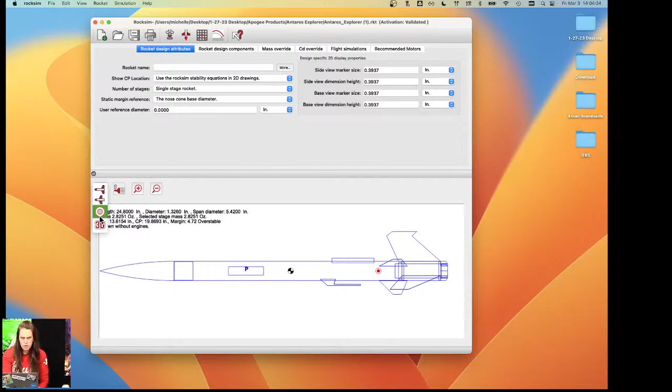This is the Antares Explorer, one of our newest rockets. I think it's the newest one. We have so many things in the works right now that I lose track of which rockets are actually released and which ones are coming up soon. We should have a new one, or we should have it next Tuesday, another one coming out. But this is the Antares Explorer here.

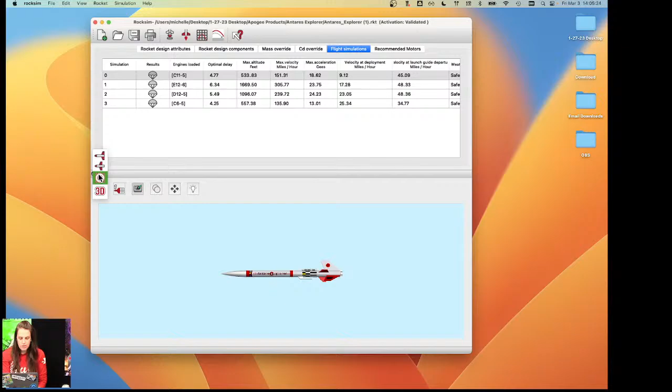So anyways, motors, right? You can see here there were some - I'm having mouse issues too, moving between my external monitor and the computer. So say last time you flew this, you flew it on a C11-5, but I reopened it, and since this is the first time I've opened it, there's no motor loaded in it. So instead of having to go in and choose engine, find the motor you want in the list, if you've flown it before...

Say you have motors that you pretty much always fly, Estes black powder motors. What you can do is run your simulation one time, and then say, oh, this weekend I'm going to a club launch, but it's going to be a little windier, or it's at a different location, and I want to change the data. So what you can do here, instead of doing that whole load engines find it in the list, is you can actually go to your previous simulation and right click.

There we go, I forgot how to right click. Is it the weekend yet?

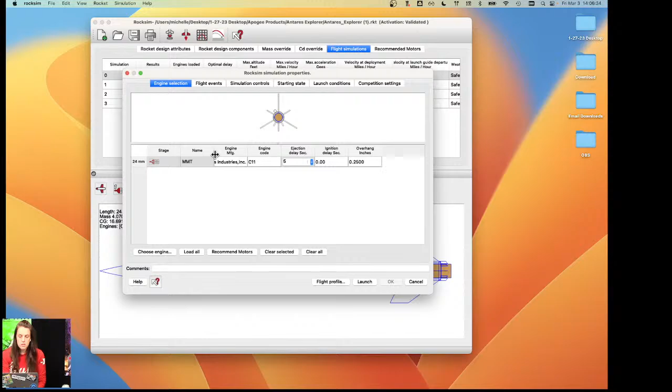So you right click, and you can either click Load Engines, which will just load the engines from last time, or if you want to rerun the same simulation, click Edit. Edit will pull all the original starting state and launch conditions. If you click Edit and change something, like instead of 700 feet we're at 7,000 feet - we're not quite at 7,000 feet here in Colorado Springs, but pretty darn close, closer to 6,000 really - you just change that.

So now if I click Launch, with the same motor and same wind settings, it's going to replace the old data. So if you don't want to replace the old data, instead of clicking Edit, you can click Load Engines, and then you can set up your simulation using whatever settings you want. So like this one has an altitude of 6,000 where I had 7,000 in the other one, and when I click Launch, it's going to generate a new line.

Oh my gosh, I think I stopped moving for the first time today.

Now I'm falling asleep. So your options are Edit, which will rerun that simulation and delete the old data, or Load Engines, which will just load the engines and let you go in and use different settings. So if you're changing launch sites but want to keep the old launch site or whatever, you can use Load Engines instead.

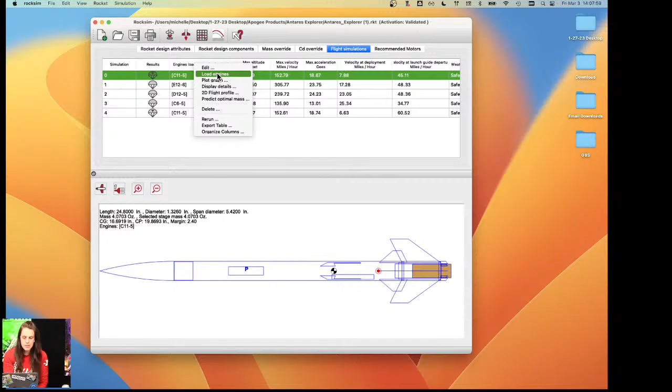When I read Stanley's email, maybe that's what he meant actually, because it doesn't load it when you first come in. So that's simple. I can also read into it that he's asking about switching between kits.

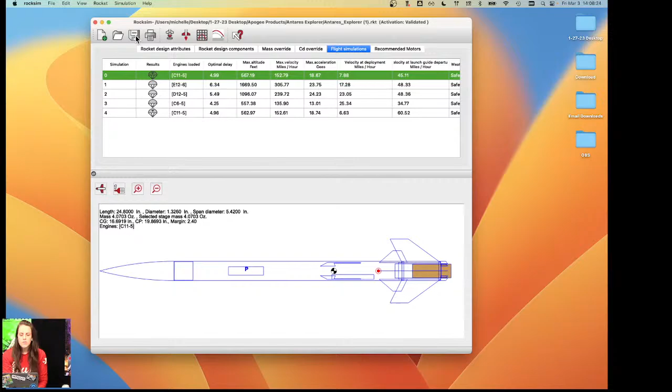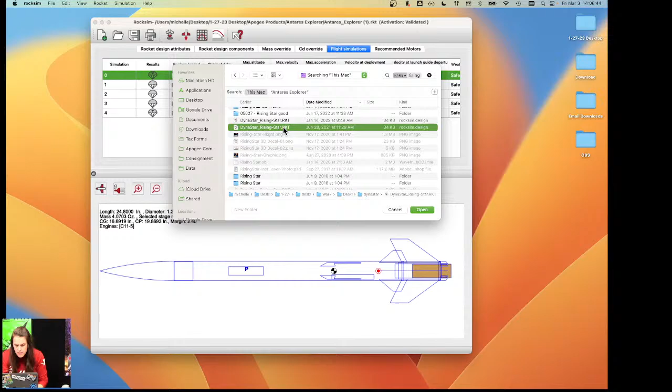So I have a bunch of D12-5s that I want to fly, and I want to test different rockets. I'm using the Antares Explorer here, and when I go to the next one, instead of the Antares Explorer, I'm going to launch - trying to think of another rocket that'll fly on it - the Rising Star. This one just happens to have a D12-5 in there, but it doesn't load it. RockSim won't remember your motors kit to kit, that's kit specific.

So depending on how you interpret the email, but you can always, if you've run the same motor before, just right click and choose from there as well. So go back to the chat.

Sturko3 says: I had trouble getting a body coupler to the right weight between two 38mm body tubes. Could you review body couplers? They showed way too much weight.

Okay, so yes, couplers - this one has a coupler in it. So the mass or weight of a part in RockSim is based on a couple things. First, when you go into the part, you will tell it the material. So paper weighs less than aluminum or PVC.

If you had paper, that means like cardboard paper, like a standard kit coupler. But think about a low power coupler versus a high power coupler - they're both made out of that rolled paper, but different thicknesses or different weight paper can change that. So it starts with kind of a generalization, and all of these are materials that you could make a coupler out of.

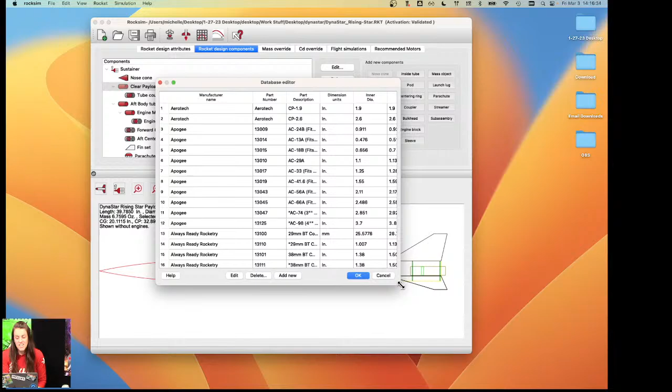The other option, if you have a coupler you bought from us or from another vendor, and you want to choose a part from the database but it's just wrong and you know it's wrong, you can go up here to Rocket, Edit Database, tube couplers, and this will edit it in the database. So for every rocket going forward, you can say no, it's going to be this amount. You can go find that coupler, this is a 56 for the Rising Star.

So this says the mass here is 11.8 ounces. If you highlight it and click edit, you can tell it no, it's actually like 9.9, which is what it's calculated. I'm not sure why it's different, other than I know it's calculating things. So you can go in and change this here. So hopefully, oh yeah.

Something's up with units here, because that window said ounces, but now look, it's 9.9 grams. I don't know, there might be a bug, or I might have just done something dumb because it's been a Friday. But yes, you can edit these things in the database. So going forward, if you want to scratch build a rocket with this coupler, you know it's right.

So those are kind of the two different ways that you can edit a coupler's weight, or any part's weight, if you disagree with RockSim.

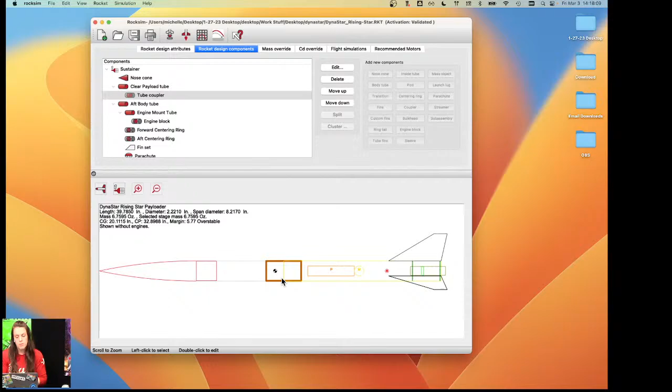We had somebody go through before we released RockSim 10 and update all of our parts, but it was done by a human, and so we found a couple errors, just human error entering things. I know there's been a couple over time, and I have a whole email list to fix things before we release the next version of RockSim. Some little tiny things. So if you do find something like that, that's just, hey, this is the Apogee coupler in RockSim, but in real life it weighs this.

You can always shoot us an email and say this isn't right in RockSim, and then I can add it to my list, because you guys use RockSim a lot more than we do, because we use it all the time, but all of you times the thousands and thousands of users of RockSim use it more and use it differently. That's the other thing, like I use it a very specific way. Tim uses it very differently than I use it. So yeah, that's one way to, whoops.

Get a little peek at our chat system there. We're working on a new nose cone, so you guys got a little flash view of that.

So yes, that's kind of how you edit parts and things. And remember, RockSim uses what's in there, so at the end of the day it's only as smart as the data that's in there. And if something's incorrect, then the data you're going to get could be incorrect for that too.

So Carlos asks, after we run a simulation with a motor, can RockSim recommend a suggested fin shape or material? Maybe someday. RockSim is not that smart.

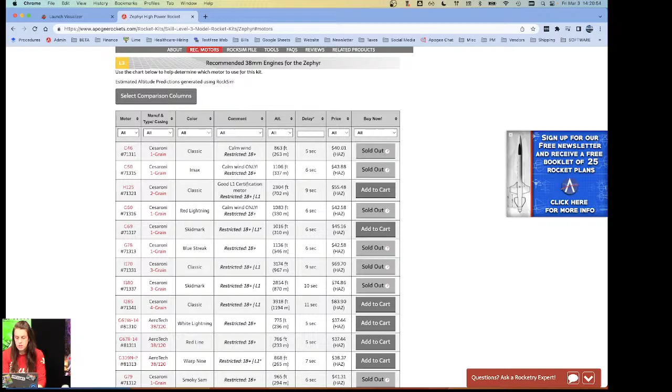So we built this feature, the recommended motor feature, into RockSim for us. It's a benefit for you guys as well, but whenever we release a new kit, or we sell a kit from another manufacturer, we create a RockSim file and we run all of the recommended motors. So for something like the Zephyr, that's a lot of motors.

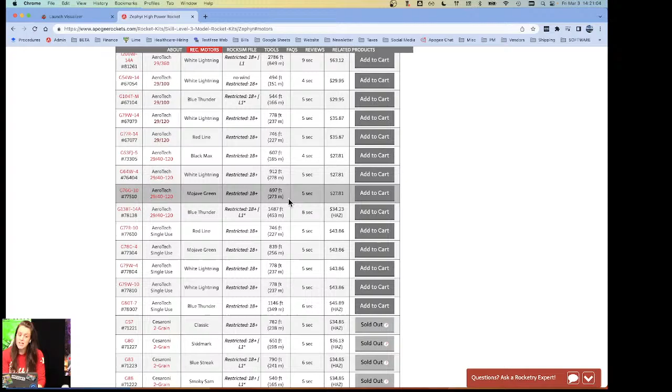And before RockSim 10, which is what we did for the Zephyr originally, you have to run each motor one at a time.

So you go, we were showing at the beginning, you have your rocket and you click load, choose engine, find your engine, change your delay, click OK, set your starting state, and set your launch conditions. Those will remember, and then you go OK, launch.

What we do is always run it for the longest delay. This didn't work because this is a tiny motor and a bigger rocket, but we run it for the longest delay. Once we figure out if the motor is safe to fly, we go back and rerun it to find the optimal delay, sometimes it'll tell you, but there's tweaking you can do. Like it says it's not recommended, but if you angle the launch rod, suddenly it is recommended. So imagine that times hundreds of motors.

So what we built into RockSim 10 is the recommended motor list. You can now, when you go to choose an engine, click recommend motors.

Like I was saying with the fin shape, this is where it comes in a bit, Carlos, to even do the recommended motors we had to say, well, what's okay and what's not. What's your starting simulation? Are you flying at sea level? Are you flying at 6,000 feet? Is temperature warm or cold? Is it windy or not windy? All of those things make different parameters that generate different results. So to do recommended motors, you have to set those.

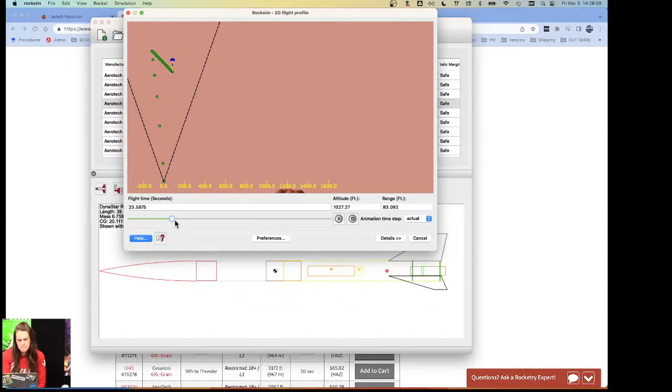It says, oh, safe deployment, it's unsafe. I see. So this was not recommended because the deployment is not safe.

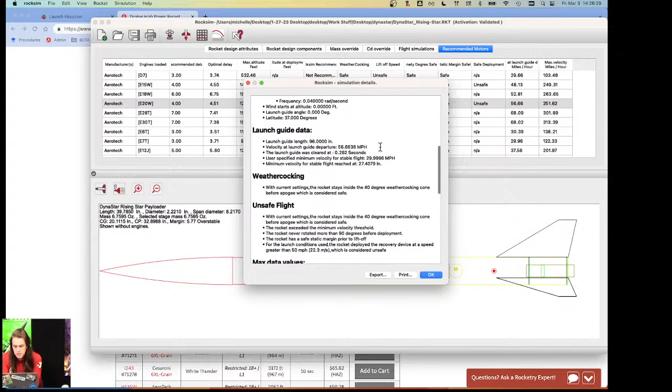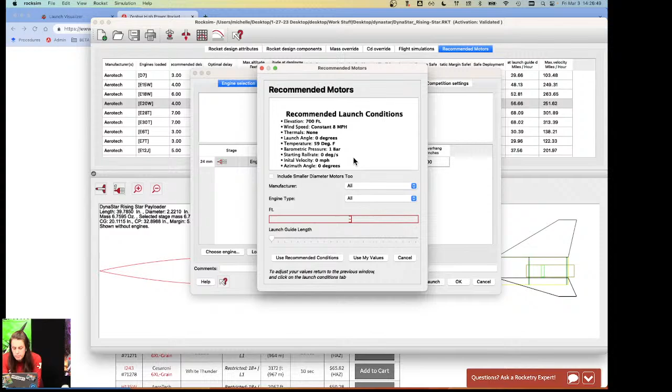So if I double click in there to go into the details, recovery system, the velocity at deployment is 65 miles per hour. And if you look at our recommended motors, it doesn't say it here, but for this one that's too fast. If it's going 65, think about driving down the interstate at 65 miles per hour and then throwing a parachute out the window and hoping it doesn't rip apart. That's why it's not recommended.

So there are different things you can do. This one isn't adjustable, but on an adjustable motor you might be able to tweak the delay down a little bit so it comes out sooner or later, or buy one that's different. Or you can use something like a chute release or dual deployment. Just because it's not recommended doesn't mean you can't use the motor, it just means you have to start thinking outside the box about why it isn't recommended.

Another example is weathercocking. Let's pick one that's maybe, here we go, weathercocking for this one.

So when we look at this, this is the weathercocking cone. If it goes outside this cone before the parachute pops out, see how it's starting to go basically horizontally? That's not really safe because it could do some damage. With the recommended motors, once it reaches that point, it doesn't keep going. But how do we fix the weathercocking issue?

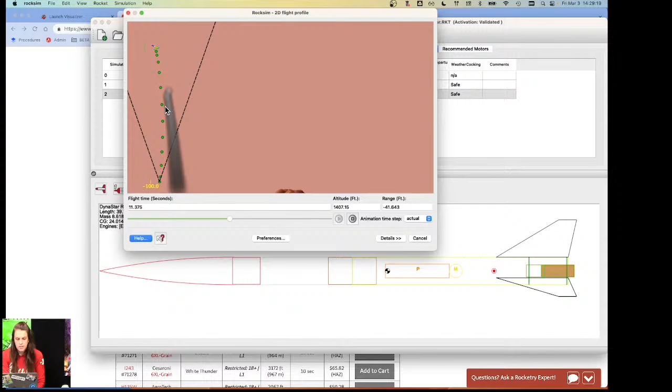So now it didn't weathercock at all because I basically corrected for that. This motor, for some reason, oh, because we ran the recommended motors, it didn't have a delay selected. I forgot, when it runs the recommended motors it'll tell you the optimal delay but doesn't actually choose it. So if you load your engines, oh and this isn't a plug motor anyway, so this is not a good motor for this rocket, but make sure you put in a delay. So that's why it crashed.

But other than that fact, we corrected for that weathercocking, so now it's safe. Just because a motor is not recommended doesn't mean you can't use it. You just have to make sure you overcome issues, like if it says your launch guide departure is too slow, so it's not safe, the liftoff speed. Your rocket needs to be going around 30 miles per hour when it leaves the launch rod to be safe, that way it can correct itself if a gust of wind hits it.

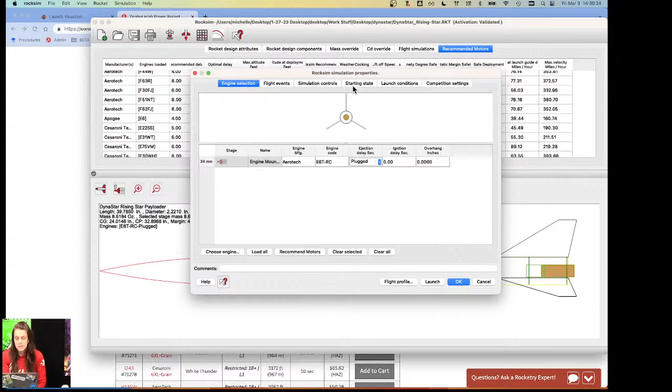Well, if this isn't powerful enough to get you there, what are your options? You can change your motor, get a more powerful motor, or you can extend your launch rod. If our starting state is, this one's 9 feet or 8 feet, you're probably not getting much longer than that. But say it was 3 feet, maybe you could get a 6 foot rod, and by that time you have 3 extra feet for your rocket to get going faster.

So that's one of the things about the recommended motor, you can totally use it and just ignore all the ones that are not recommended. That is fine, it's a starting place, it says hey these work well, it's kind of a no-brainer, this is what we can say. But just because it says not recommended doesn't mean you can't use them. There are some that you absolutely can't use, you're not going to put a little tiny quarter A motor in this rocket, you're never gonna get a combination that makes it safe.

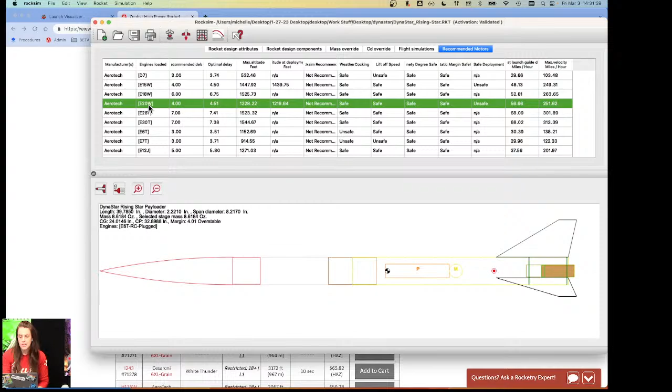But this E20, you can just figure out maybe on a calm day it won't be going 65 miles per hour when the parachute pops out. So I can fly this rocket on an E20, I just have to wait for a really calm day for it to be safe. Or if the liftoff speed's unsafe, maybe I need to get a longer launch rod. So it's kind of a cool tool.

So yeah, Carlos, it would be great if we could give you more flexibility like that. The one other downside to doing something like this is a recommended fin shape for a rocket, is that a lot of schools do projects like that. We get calls a lot from kids to basically do their homework for them.

They'll call and say, what's the best fin shape? Or you can tell they're filling out a form and just reading the questions, wanting us to answer them. So part of it does help build a little bit of critical thinking. I think that's one of the things this RockSim Live and Tim are really good at - it's always about problem solving. I feel like that's a skill becoming less valued or less used, especially when you have things like Google giving you the answers - Google, what's the speed of light, whatever. You don't have to do much research, you just pop it in. Or now we've got the ChatGPT mess, and you don't even have to think at all.

So while it's great for it to tell you different things, I think it's also great to use your skills a little bit and think. With this example, you can totally use this recommended motors list, but there's no thinking involved other than, okay, from this list which motors do I want? Which one's the cheapest? Which one can I get without hazmat shipping? Which one do I already have in my range box? That's the extent of it, maybe if I'm flying on a smaller field - which one would be best that's not going to go as high?

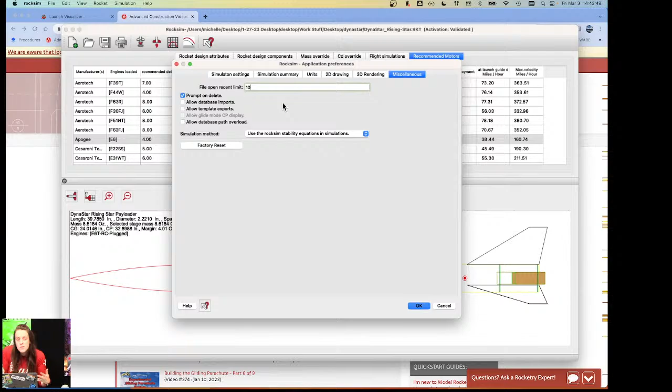So I know it does remember things to a point, but whether it remembers them file to file or every time, let's test and see. Because I know we were doing that before where we had, so like...

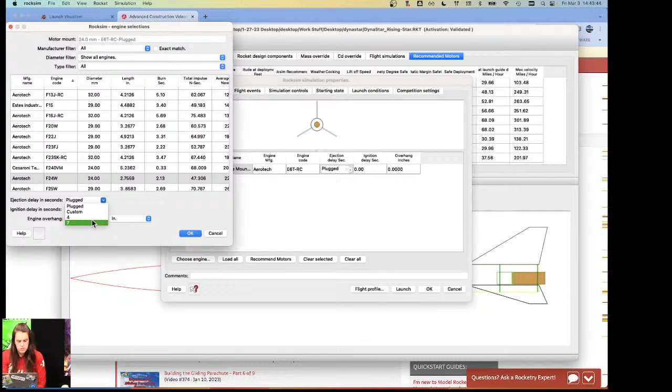6230, we're going to put our altitude here. And today it is 40 degrees outside. I don't remember what our latitude is here. And we're going to say today is 7 miles per hour wind here. So okay, I'm going to choose an engine here. We're just going to launch something.

Okay, so we flew our rocket. I'm going to save this. Now I'm going to open a different rocket kit and choose my engine. And if I go to my launch conditions, it has remembered my data here. So it's remembering it time to time.

But let's quit RockSim and reopen it. I know it remembered some stuff, I just don't remember. So there's not a default setting that you can go in and say always start at 6,000 feet or whatever. So file, open, let's pick a totally different rocket than the ones we've flown today.

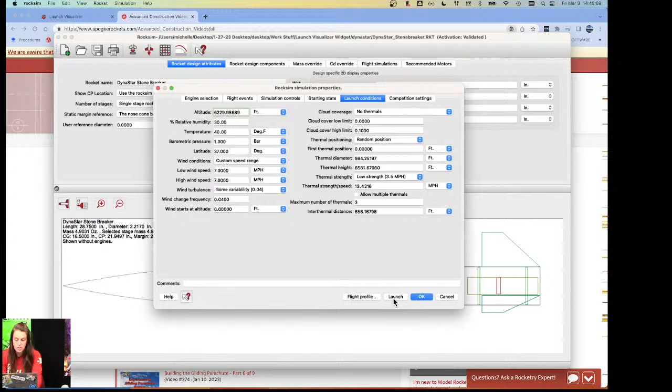I can tell I like my Dynastar kits, they're just good solid ones. So then if I choose my engine and go to my launch conditions, for some reason it's rounding, which is interesting, but it has saved my temperature. It saved all my stuff again. So basically, unless you change it, it should remember it. Or if you go into your flight simulations and click edit or rerun, it will run them with those other parameters.

So yeah, hopefully Rick you can kind of do that. The big thing is you can set your weather conditions and things if people tend to launch in kind of the same places, so that's easy. The big sticking thing would be your launch rod, launch rail length. That's something that gets me. Like we were flying the Rising Star on an 8-foot rail basically, even though it flies on a rod, because I don't always remember to check that. So I know that one can get me in trouble sometimes because I'm like, oh, this motor works fine because it's flying on an 8-foot rail, but I'm only going to be flying on a 4-foot rod, and that motor wouldn't work in that case. So that's the one thing to check. But hopefully it should remember that flight to flight for the most part.

So Sturco 3 says trying to enter a fin onto a body tube and having trouble with extending the fin starting from the end of the body tube and going further back at an angle of 1.5 inches then horizontal.

I have two different ideas about what you're kind of asking about, so we're going to start with one and then go to the other. So your fins, one of the things is RockSim likes to default, like your location on the actual tube. So sometimes this one will let me, but sometimes it won't let you go past the end of the tube. So you can manually type, if the slider bar doesn't let you, you can manually type it in, or say it's from the base of the tube.

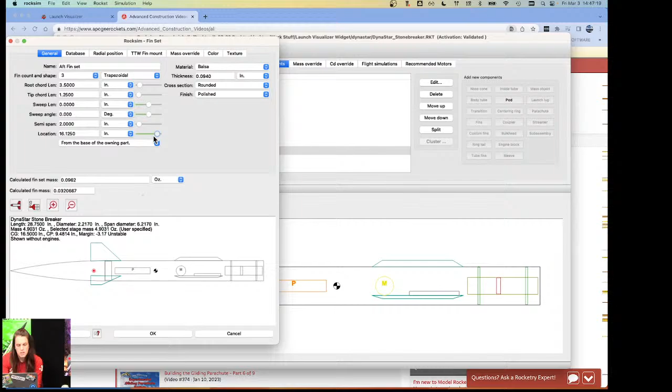How did you reset? So you'll notice the slider bar, normally it doesn't really go negative. So you can type in, but if it doesn't go to where you want, like say it only goes to negative, in this case it's going to negative 3.5. But I could type in -8. I mean, I don't know why your fins would be back here, but you can do that. So if you're having trouble with the actual positioning of the fin, this location is where you want to be.

You can measure from either the front of the tube or the back of the tube. It doesn't matter which one you choose. I think it defaults to the front, but I use the base a lot. The biggest time when this is useful, important even, is if you're playing with something like the length of your body tube.

So if you start out with your body tube being, say, 6 inches, and your fins are measured from the front of the body tube 6 inches back, but then you make it twice as long, 12 inches - if you measure from the front of the tube, your fins are only going to be 6 inches back. If you measure from the base of the tube, it's always going to be relative to the back. That's where the base fin location comes in handy, if you're messing with the length. Otherwise it doesn't really matter, because at the end of the day it's just which point you're measuring from.

You can also measure from the nose tip. That seems confusing to me, but whatever works for you.

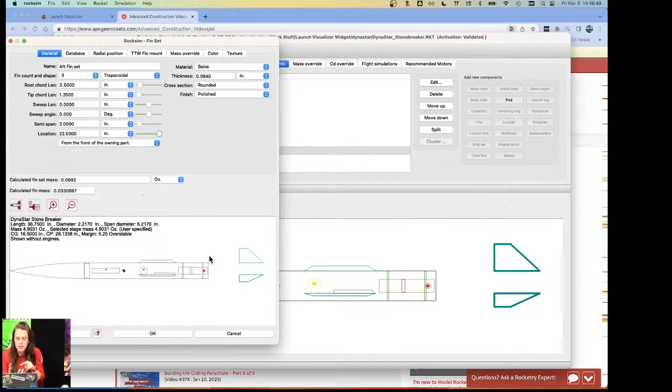The second part of your question sounds like you're trying to design a fin that starts like this, goes at an angle, then horizontal - a funny shape basically. This default fin here, you're using it like a trapezoidal standard fin.

If you're trying to do something different, let me just delete these fins. Instead of using the regular fins, because those will be standard shapes - trapezoid or elliptical - there's nothing you can do about that.

Tickle in my throat.

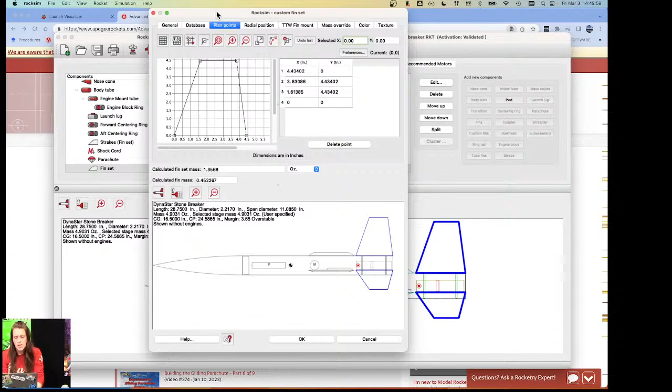Instead of using the regular fin button, you're going to want to use the custom fins button. With custom fins, you can still choose from the database, but you can go to the plan points tab, and this is where you can get a little goofy.

What if you want - so now you can start putting in extra tabs for your rocket. I know you can do fins that taper down, but I haven't done any in a long time.

So then you can just add a plan point. Your fin can be any kind of shape you want. So maybe instead of like this, maybe it comes here. The other thing you can do, if it doesn't like that, is edit the points here - like this point, which I guess is this guy.

So will it let me do a negative? Ha, that's how we can do it. If it doesn't let you drag and drop...

If you want your fin to look like this, see, you can see right here on my drawing - so it does this. You have to remember you're using the custom fin set, not the standard fins, because with custom you can design whatever you want.

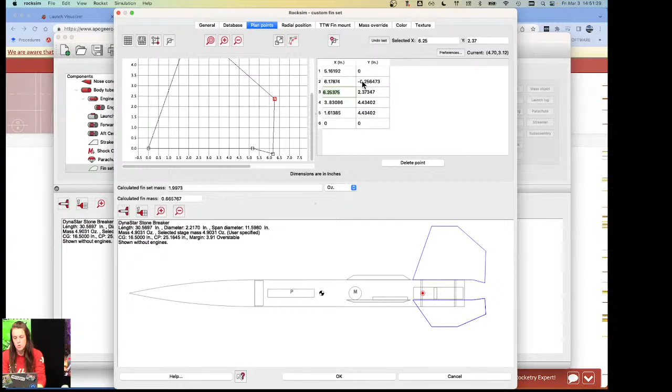And then just draw your shape here. Once you have your plan points, you can also just get a rough shape even, and then measure your points and type in negatives. So now we have these points here and my fins look super cool here. Then you can tweak the location to get it right.

Depending on your rocket, this won't work for your motor, but... oops, that was not right, I broke it.

So hopefully, does that make sense, Dirk? Does that answer your question on how you can do fins in weird places? That's what Terry said too in the chat, so hopefully that gets you there.

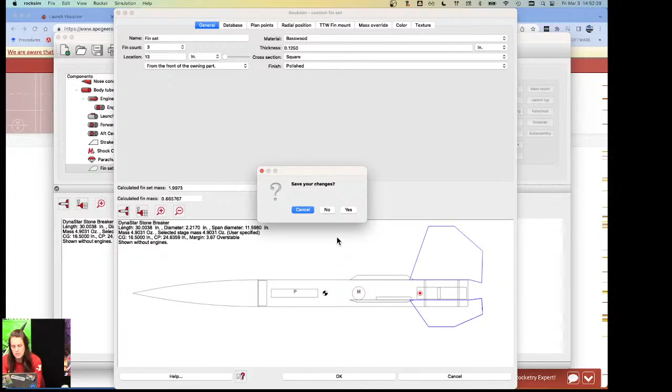Just remember, custom fin set is where you can do goofy, strange shaped fins and then locate them however, and you can do the angles. With the standard ones, you're kind of locked into just picking a shape.

You can do some fun things, but no matter what you do, there's still a trapezoid. So you can't do a random bump somewhere with these. Depending on what your fins look like, you might be able to make this work if you're trying to do funny things. These can get tricky just trying to hone in on the different angles and things.

I've definitely struggled with that before too, trying to get my fins exactly how I want. So even if you're doing a trapezoid, you can do a custom fin that's a trapezoid. Sometimes that's easier because then you could just say point here, point here, point here, and you don't have to worry about the semi-span or the sweep angle. So yeah, that did answer your question. These are questions I can answer today, it's always exciting.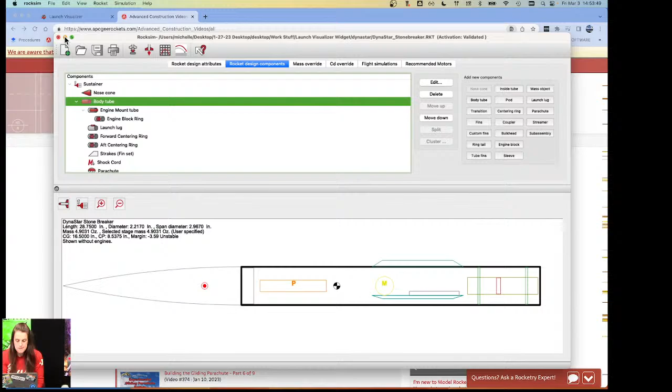So the other question we got in the email, Tim already answered the customer, but it has to do with... I should have run these before, now that I'm thinking about it. So I need a two-stage rocket, actually.

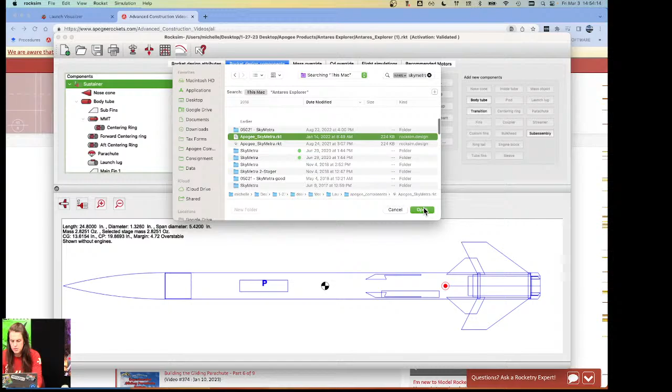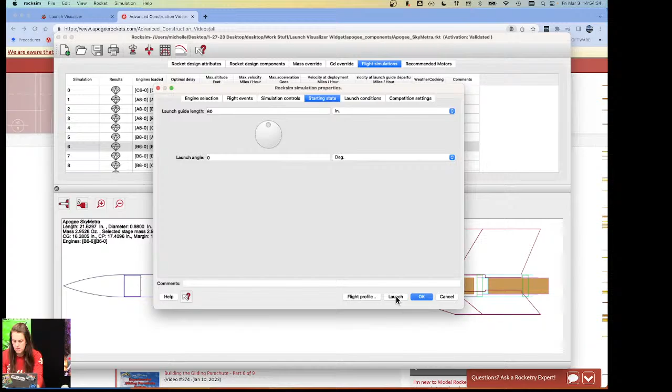So let me just load this. I did funny things here. So you run a simulation with a two-stage rocket, and you go to the 2D flight profile, and fly it. This is using the default. You can see I changed my background to Mars at some point, which you can do in the preferences. So this is just the default rocket: blue nose cone, blue fins, yellow tube. And then they're really tiny.

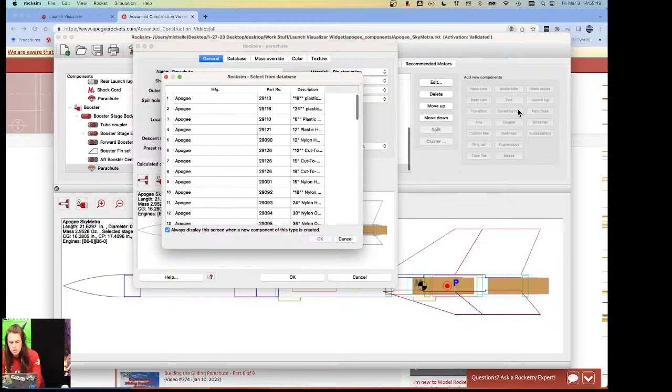You can see the booster fell off and was coming down, and then the rocket's coming down. And this rocket does not have a parachute in the booster, but we are going to put one in.

So when you have multiple stages, the default in RockSim is the parachute will pop out at the max ejection delay. So you're flying a B6-4, your rocket will go up, and 4 seconds after the motor burns out, your parachute will pop out. But for a two-stage, your motor's ejection charge is set to go off at 0. So you don't want your parachute popping out there, because that's what pushes your 2 stages apart for black powder motors.

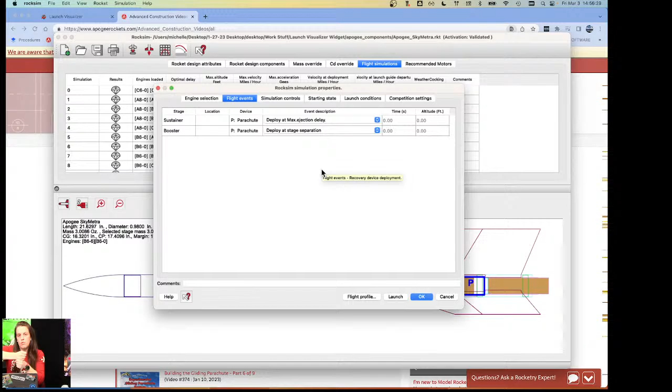So your parachute has to come out at a different time, theoretically. I think you can still set it for whatever - deploy at stage separation, deploy at time after stage separation, or deploy at altitude. We're just going to deploy at stage separation. So basically, when the 2 pieces of the rocket separate, that top part's going to pull the parachute out of the bottom one, so it's going to come out on its own.

So now we're going to launch this again, and we look at our little cartoon. The booster is hiding there, but let me turn off smoke effects - there we go, it was blocking my way. So there's our little booster right there, but there's no parachute. And so the person was like, the parachute's not working.

So in this little 2D flight simulation, you can also make it look like your rocket. So instead of looking at this blue and yellow rocket, it's actually going to look like the SkyMetra. To do that, you have to run sprites. You go into your preferences and go to rocket image. I highly, highly, highly recommend putting these in a folder, because it produces hundreds of files when you run this. And if you put it on your desktop, it gets a little crazy.

Oops, I didn't run my sprites. Choose path, generate. So basically, it's going to take little pictures of the rocket at every different step, like the old-timey cartoons where they took a picture of every single drawing, and it's going to generate those. And so basically what we're looking at is, even when you generate the sprites and it looks like a rocket, your booster stage parachute is never going to show up. It just wasn't part of RockSim when it was built.

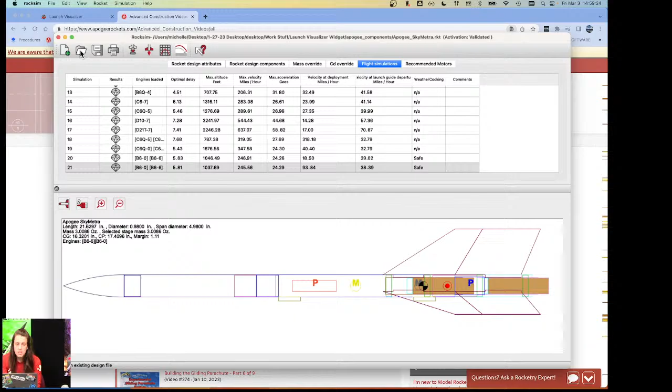But when we launch it, gosh, there's no parachute there still. But when the parachute pops out here, it's showing up there - it's really, really tiny, I don't know why this is so tiny. Basically, they were saying it doesn't work. It does work, but the way you have to see it is to plot it in the graphs to see the data change. But in the launch visualizer, you can do this.

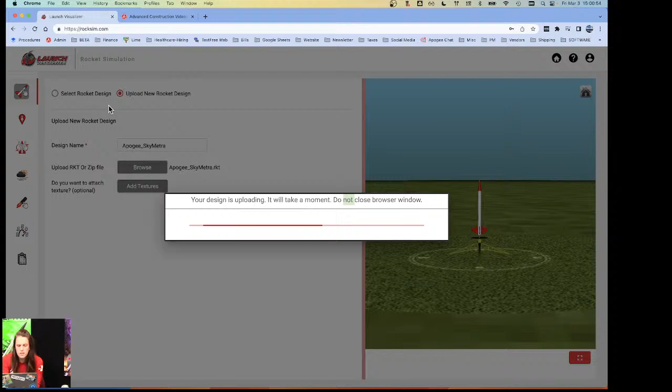This only has one motor. Something's up with this, I'm not sure what's going on. Oh, this is also not the right kit. Upload - I didn't select it. That's why. Losing my mind.

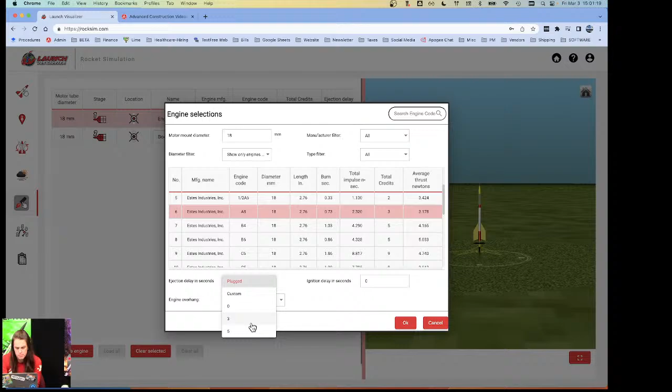I'm going to click load all, and then I'm just going to change the delay to 0 here. And then flight events, so then we set our staging and max ejection delay, our parachute in the upper stage at max ejection delay, and then our booster at max ejection delay, which is also stage separation in this case. So we're going to launch it - simulate.

So now we zoom out. Should have - whoa, we zoomed out a little far. I am zoomed out so far. Okay, you can't really see it because of the smoke.